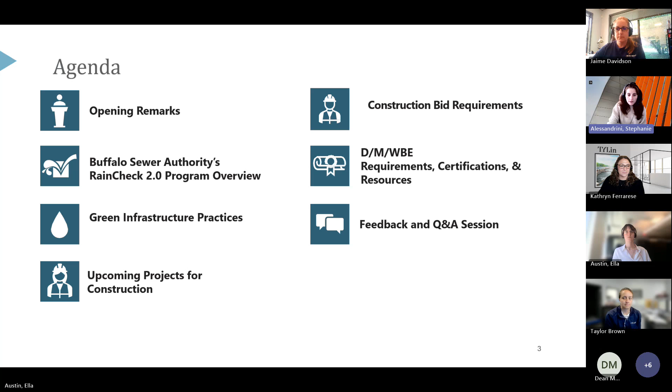The presenters we're going to have today: Rosaleen Nogle, the Principal Sanitary Engineer for Buffalo Sewer Authority - I think she's running a little bit late, so hopefully she'll be able to jump in and join us soon. We also have Kathryn Ferrarese, the program manager for the Queen City Clean Waters program. And then also myself, Stephanie Alessandrini, I'm the program manager for the green infrastructure side, and I'm with Stantec.

Just a disclaimer: this presentation is provided on June 16th, 2026. If you're viewing this after this date via the online recording, subsequent events could have had a material effect on this information. By presenting this information, Buffalo Sewer Authority has not undertaken any obligation to update it beyond the date of the presentation. Data and other information provided are not warranted as to completeness or accuracy and are subject to change without notice. The views, policies, programs, and practices reflected herein are also subject to change without notice, and this presentation is provided for your information and convenience.

The best place to find information on the upcoming opportunities is to go to buffalosewerauthority.org. You can hover your mouse over the top header, 'How Can We Help You?', and then click on the consultant, contractor, and supplier opportunities. This is where we'll have the upcoming bid opportunities that are coming out, for you to see.

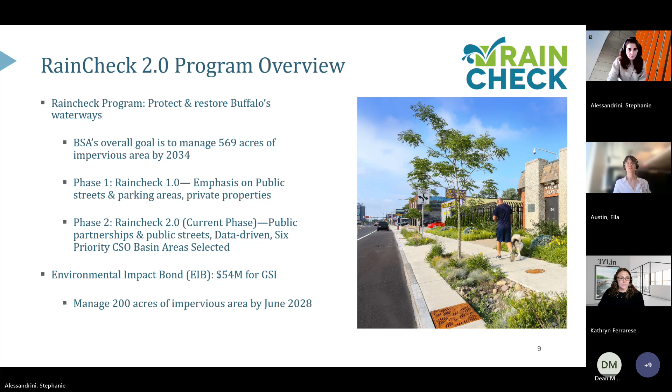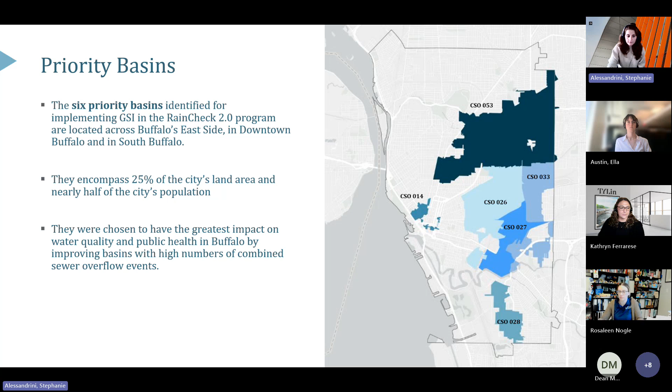So a little bit of timeline, the Rain Check program timeline and where we're at. In 2004 through 2014, there was development and approval of the long-term control plan. In 2015, the launch of the Rain Check 1.0 program. 2018 began the launch of the Rain Check 2.0 program. In 2021, BSA secured the $54 million environmental impact bond funding.

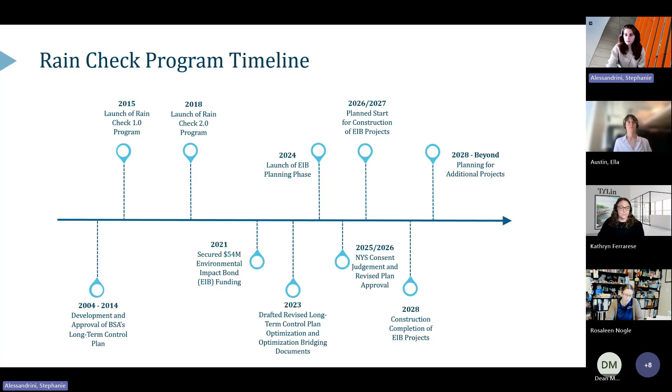In 2023, they began drafting the revised long-term control plan with optimization of the bridging documents. 2024 was the launch of the EIB planning phase, and then where we're at right now is finishing up the design with the GI projects, getting ready to release those for bid for construction. The consent judgment has also been submitted, so we're waiting on the final approvals for that.

So then the program packages. The planning phase had identified approximately 550 GSI practices across the priority sewer basins. With the goal of managing that 200 acres of impervious area, the packages are split into 14 different packages, located across those priority basins.

Within there is a Buffalo Public Schools package, the Municipal Housing Authority sites, and also city parks properties. The program management is by Stantec, and the design is currently being undertaken by AKRF, Wendel, Watts, and Stantec as well. Within here too, just a note that the BPS, BMHA, and parks packages are indicated by the pins within those boundary areas.

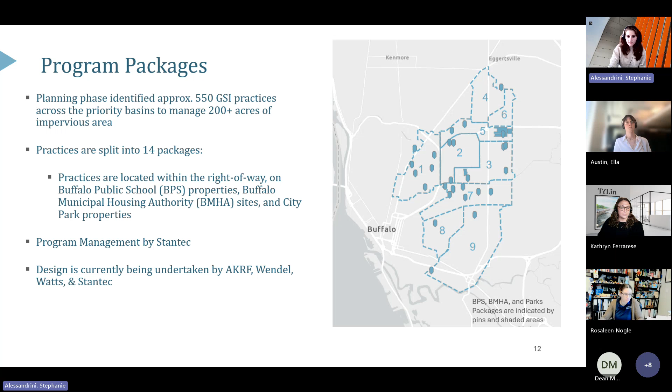So then getting into a little bit of information about the green infrastructure practices. There are four main different types of practices that we're proposing within the program. These include bioretention basins and swales, stormwater tree trenches, underground storage basins, and stormwater planters.

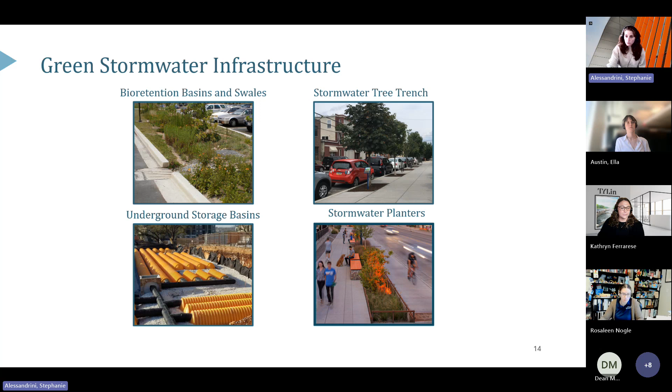So with the rain garden and bioretention areas, they're going to be designed either as flow-through systems or as infiltration systems, depending on the quality of the underlying soils, and also depending on the groundwater table. These are generally going to be located within the parks properties and also within school properties where there's available space. The depth for these systems varies between approximately 3 feet and 5 feet, depending on the site-specific conditions.

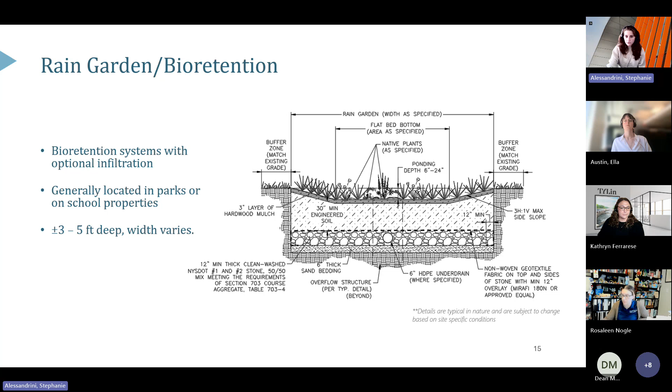So this is one of the typical details that we have included. Some of the details are undergoing a few revisions now, so there may be some minor adjustments that you'll see within the final sets that are released for bid.

The other types of systems that we're proposing are the stormwater tree trenches. These may have the infiltration option available as well, depending again on the underlying soil conditions. These will generally be located along the right-of-way underneath the sidewalk, and may extend beneath the curb line. On average, they'll be about 3 feet to 5 feet deep and up to 150 feet long.

This is an approximation, so depending on site-specific conditions, there may be some minor changes within the project-specific packages that are released. For some of these tree trenches, there may or may not be the option to include trees depending on the existing utilities or site constraints. In those situations, there may be some that only include the underground storage component with the stone reservoir and don't include trees within those specific areas.

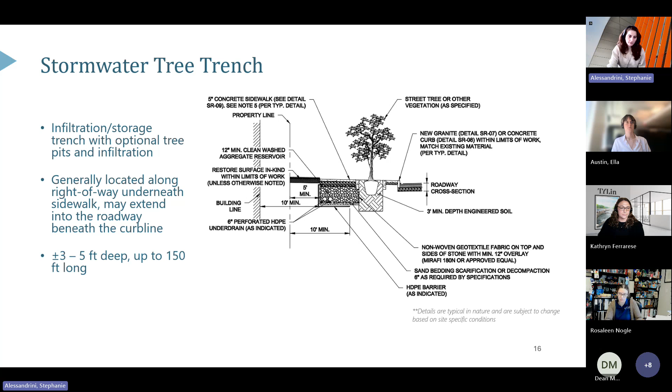That'll be denoted within the individual plans as well. And this is the infiltration trench. Some of these will be the systems designed without the tree pit included. So again, these are labeled infiltration trenches - some of them may infiltrate, some of them may not.

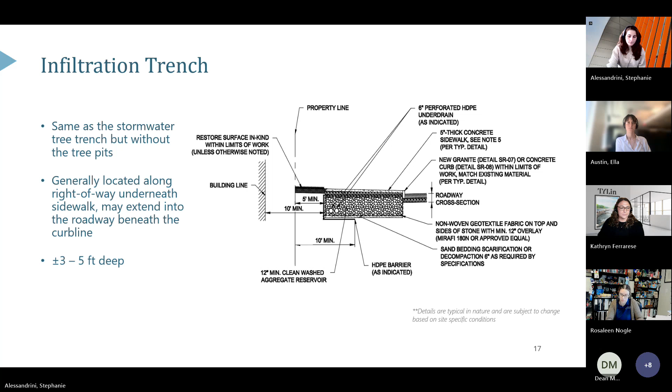In areas where we are concerned about potential for groundwater intrusion, there'll be an impermeable liner, and that will be indicated on the plans as well. Then the other item we have is the underground storage. This will be similar to the StormTech SC800 or similar kind of configuration for that underground storage reservoir. On average, these will be about 5 to 10 feet deep. We currently have this proposed on the Hennepin Parks Package 1 design, and there'll be a few others where we have that one included as well, which we'll get into a little bit later.

This is just the traditional underground storage kind of configuration, which will include the isolator row as well, wrapped in fabric, with the manifold and distribution to the other StormTech chambers surrounded by that stone reservoir. In areas where we're concerned about potential for groundwater intrusion, we will include that impermeable liner as well.

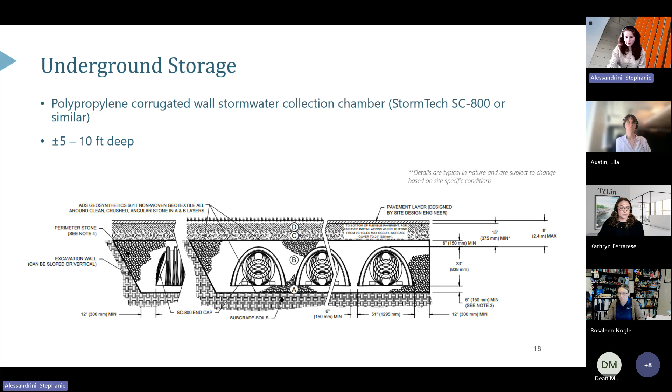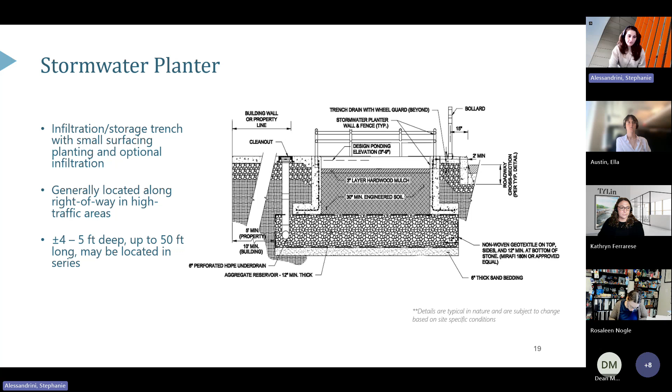There will also be some stormwater planters included, primarily within the parks packages and potentially on the schools or other areas that have available space. These will be approximately 4 to 5 feet deep and up to 50 feet long.

And then the bioswales as well. These will be located in areas that have suitable space available, most likely the Buffalo Public Schools package and potentially the parks packages as well, located in those grassy areas to help provide some of that conveyance.

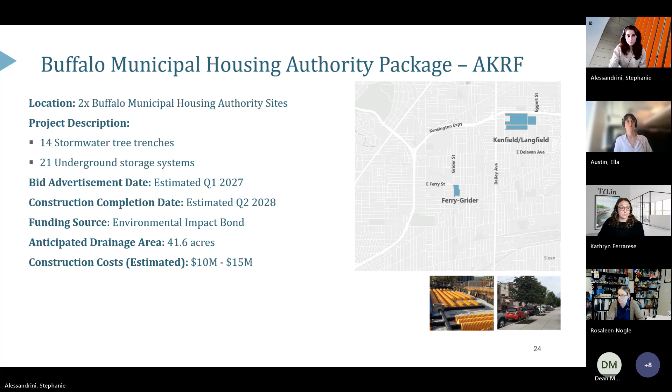Then we have the Buffalo Public Schools package being designed by Stantec. This will take place at approximately 16 Buffalo Public School properties, with approximately 36 total systems, including 5 bioretention basins, 7 stormwater tree trenches, 1 bioswale, and 23 underground storage systems. The bid advertisement date for this is estimated to be in Q3 of 2026, with the goal of construction completion by early 2028.

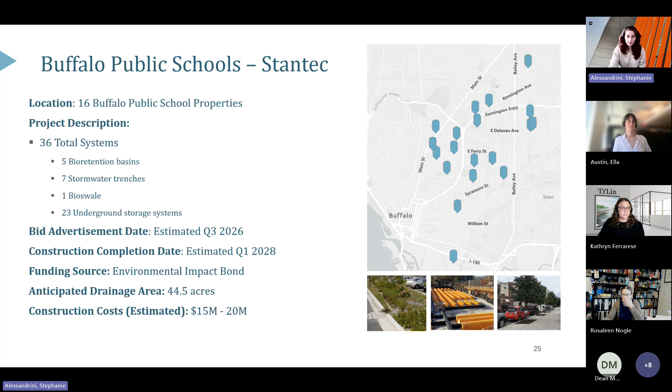Third-party verification will need to be completed prior to Q2 of 2028, per the requirements for the funding source of the environmental impact bond. The anticipated drainage area is approximately 44.5 acres, and the estimated construction cost is approximately 15 to 20 million.

Then there's right-of-way package 1 by Stantec. This is located within the right-of-way in the Masten Park, Hamlin Park, and Parkside neighborhoods. There's approximately 20 subsurface stormwater trenches included, a combination of stormwater tree trenches and infiltration trenches, with a good portion expected to not infiltrate at all. The estimated bid advertisement date is Q4 2026, with a construction completion date goal of Q1 2028. This will include funding from the Environmental Impact Bond and the Environmental Facilities Corporation Green Resiliency Grant, so this package will need to comply with those grant funding requirements. The anticipated drainage area is approximately 7 acres, and the estimated construction cost ranges from approximately 3 to 5 million.

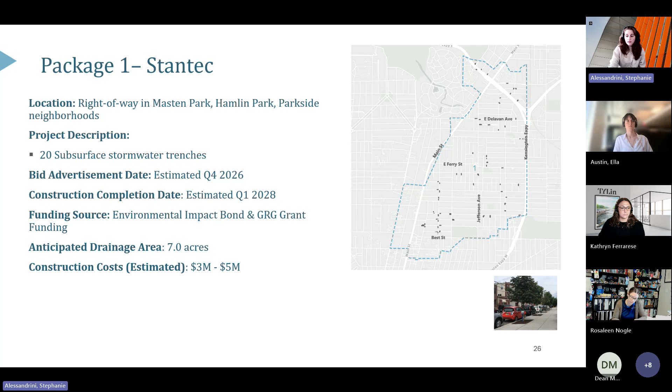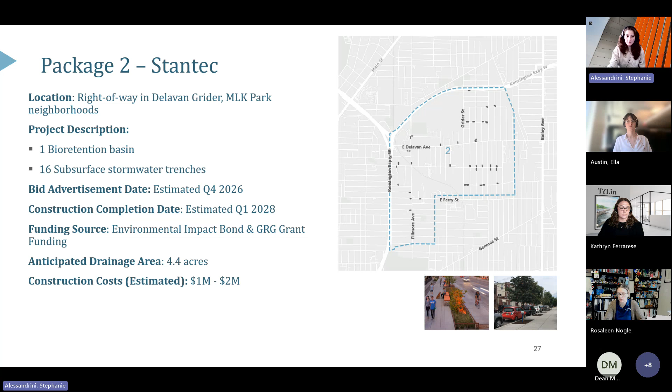Then for right-of-way package 2, this one is also being designed by Stantec. This is located within the right-of-way area in the Delavan Grider and MLK Park neighborhoods. This includes stormwater tree trenches and a bioretention basin: 1 proposed bioretention basin and 16 subsurface stormwater tree trenches, a combination of trenches that may infiltrate and those that won't, and trees and non-trees. This will be identified in the bid documents when released. The estimated bid advertisement date is Q4 2026, with estimated construction completion by Q1 2028. This package also includes Green Resiliency Grant funding and will need to comply with those requirements, as well as the Environmental Impact Bond funding. The anticipated drainage area is approximately 4.4 acres, and estimated construction costs range from 1 to approximately 2 million.

Then there's right-of-way package 3. This is being designed by Wendel and consists predominantly of stormwater tree trenches and underground infiltration trenches. Right-of-way package 3 is located within the right-of-way in the Schiller Park, Genesee Moselle, MLK Park, and Kenfield neighborhoods. The estimated bid advertisement date is Q4 2026, with an estimated construction completion date of Q2 2028. This will only include the Environmental Impact Bond funding; at this point there's no associated grant funding with this project. The anticipated drainage area is 14.3 acres, and construction costs are estimated at about 5 to 10 million.

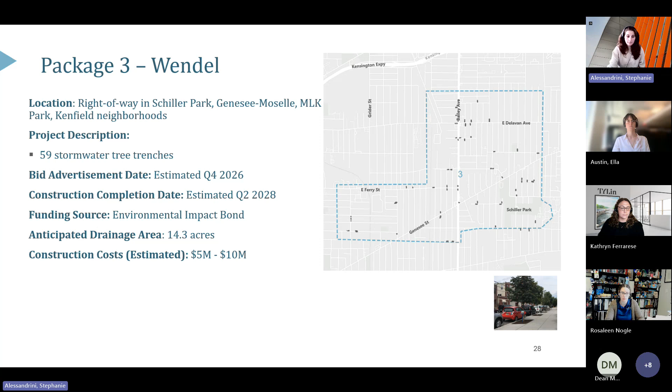Right-of-way package 4 will be designed by Stantec, located within the right-of-way area in the University Heights and Kensington Bailey neighborhoods. This package will consist predominantly of stormwater tree trenches, again a combination of trenches with trees, without trees, and either infiltrating or not infiltrating. Estimating the bid advertisement date by Q4 2026, with estimated construction completion by Q1 2028. The funding source will be through the Environmental Impact Bond, and if needed will also include the Green Resiliency Grant funding. It's to be determined if additional practices from this package will need to be included for the grant funding requirements, so there's a possibility that this package or portions may need to comply with those requirements.

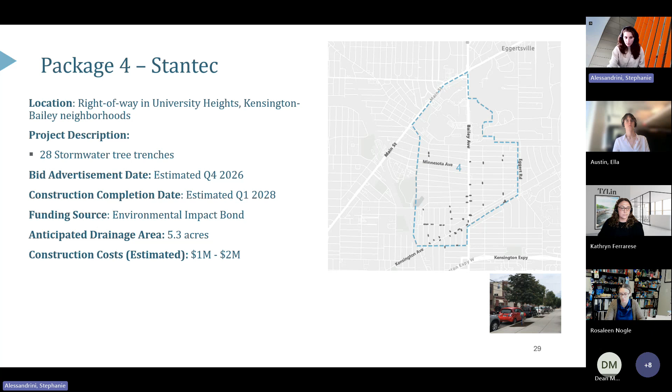Right-of-way package 5 will be designed by Wendel. This is located within the right-of-way of the Fillmore Leroy, Kensington Bailey, and Kenfield neighborhoods. There are approximately 28 stormwater tree trenches within the design area. The estimated bid advertisement date is Q4 2026, with estimated construction completion by Q1 2028. The funding source will be through the Environmental Impact Bond. The anticipated drainage area is approximately 9.7 acres, and estimated construction costs are on the order of $3 to $5 million.

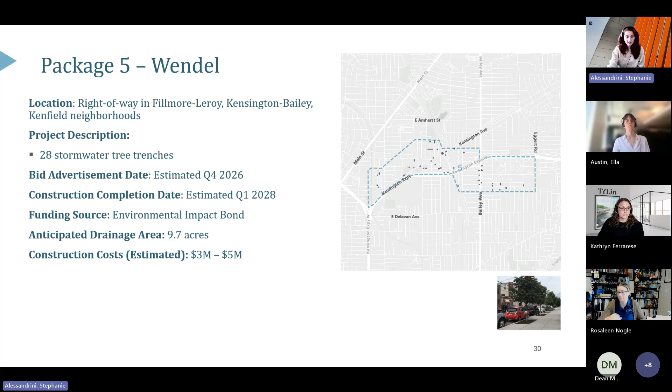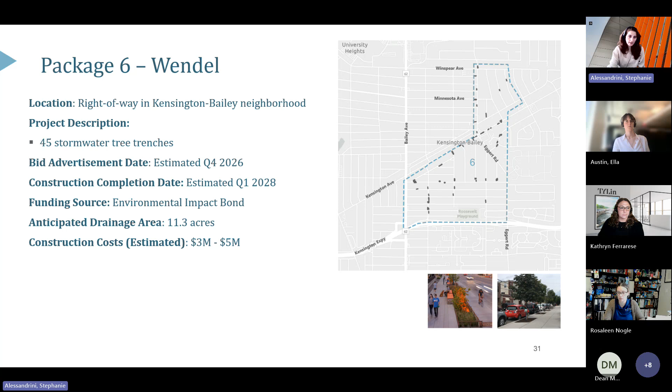There's right-of-way package 6, also designed by Wendel, located within the right-of-way in the Kensington Bailey neighborhood. There are approximately 45 stormwater tree trenches proposed, with the bid advertisement date expected within Q4 2026. The anticipated construction completion date is by Q1 2028. The funding source will be through the Environmental Impact Bond. Anticipated drainage area is approximately 11.3 acres, and anticipated construction costs are $3 to $5 million.

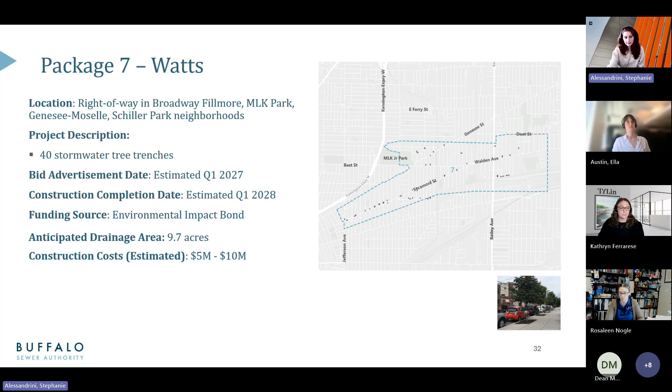Then right-of-way package 7 will be designed by Watts, located within the Broadway Fillmore, MLK Park, Genesee Moselle, and Schiller Park neighborhoods. This will include approximately 40 stormwater tree trenches. The bid advertisement date is Q1 2027, with an estimated completion date for construction by Q1 2028. The funding source will be through the Environmental Impact Bond. The anticipated drainage area is approximately 9.7 acres, and anticipated construction costs are approximately $5 to $10 million.

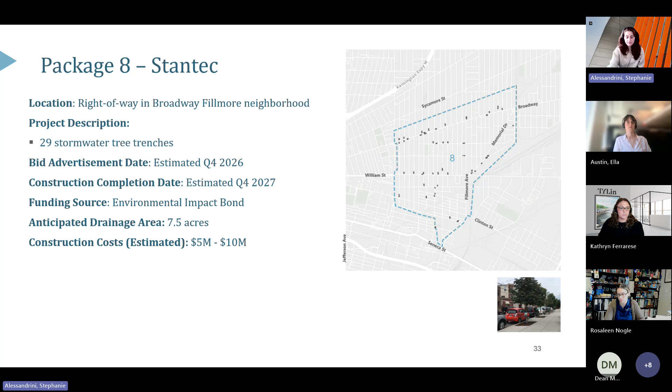Then right-of-way package 8 will be designed by Stantec, located within the right-of-way of the Broadway Fillmore neighborhood. There are approximately 29 stormwater tree trenches, and the estimated bid advertisement date is Q4 2026. The estimated construction completion date is end of 2027. The funding for this will be through the Environmental Impact Bond. The anticipated drainage area is approximately 7.5 acres, and estimated construction costs vary from about $5 to $10 million.

And then right-of-way package 9 will also be designed by Stantec. This is located within the right-of-way of the Lovejoy, Broadway Fillmore, and the Seneca Babcock neighborhoods. This includes approximately 27 stormwater tree trenches, with the estimated bid advertisement date of Q1 2027. The estimated construction completion date is Q1 2028. The funding source for this will be through the Environmental Impact Bond. The anticipated drainage area will be approximately 7.1 acres, and the estimated construction costs will be on the order of $3 to $5 million.

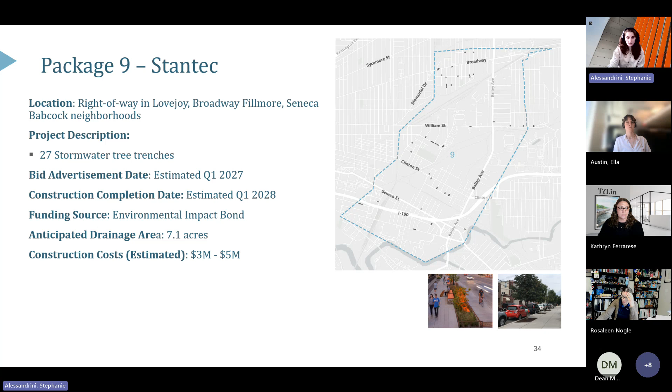I removed Parks Package 1 since that one had already gone out to bid and that bid was awarded. That was awarded to, I believe, Destro Brothers. Then there's Parks Package 2, which is currently under design by Watts. This is located within the MLK Junior Park, the Genesee Gateway Park, Eddie Dawson Park, and within the Lincoln Playground, as we've shown here within the screenshot on the right.

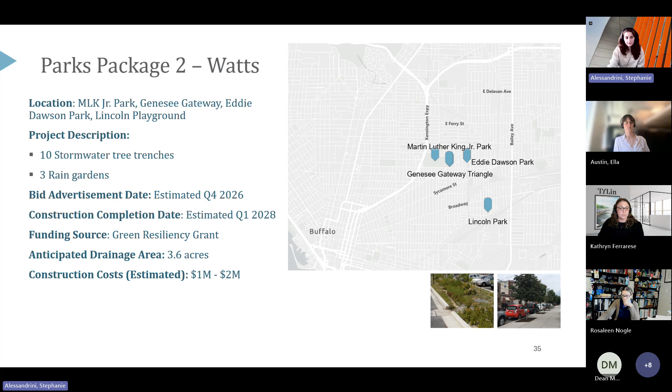These packages will include approximately 10 stormwater tree trenches and 3 rain gardens. The bid advertisement date for these are expected in Q4 2026, with the required construction completion date by Q1 2028. The funding source for this package will be through the Green Resiliency Grant through the Environmental Facilities Corporation, and so construction will need to comply with those requirements. The anticipated drainage area will be approximately 3.6 acres, and the estimated construction costs will be on the order of 1 to 2 million.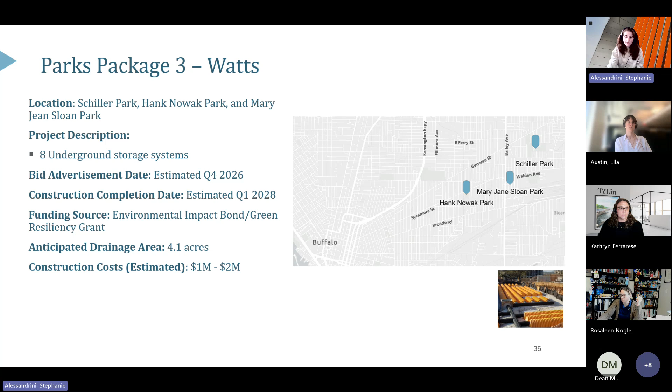The funding source for this will be primarily from the New York State Environmental Facilities Corporation Green Resiliency Grant funding, and so it will need to comply with those EFC requirements, with some supplemental funding from the Environmental Impact Bond as needed. The anticipated drainage area will be approximately 4.1 acres, and the estimated construction costs will be on the order of 1 to 2 million. So that wraps up the proposed green infrastructure projects. Now I'll turn it over to Kathryn to discuss the upcoming gray infrastructure projects.

Thanks, Stephanie. Welcome and thank you for joining us. I'm Kathryn Ferrarese, the Program Manager for Buffalo Sewer Authority's Capital Improvement Plan Program. I'm joined today by 2 members from JM Davidson Engineering, Jaime Davidson and Taylor Brown. They are representing members of the program management team and are also the design engineers for the 2 projects that I'll go through this afternoon.

This afternoon, I'll provide updates on 2 major Queen City Clean Waters projects that are scheduled to advance to construction by the end of this calendar year. These projects represent important milestones in the implementation of Buffalo Sewer Authority's long-term control plan. Since the original LTCP was developed, BSA has completed quite a bit of additional work, additional planning, hydraulic modeling, and alternatives evaluations to better understand how to achieve the water quality goals associated with the long-term control plan. As a result, the program has evolved from a collection of individual projects to a more integrated system-wide strategy focused on maximizing overflow reduction and environmental benefit.

BSA recently submitted an amended long-term control plan to the New York State Department of Environmental Conservation for review and approval. Following DEC approval, the updated LTCP will be made available to the public and will serve as the roadmap for the Queen City Clean Waters program and investments across the city of Buffalo. This afternoon's presentation will take an early look at 2 of those projects that are helping advance that future program forward today. We appreciate your interest and involvement as BSA continues to invest in infrastructure that will benefit Buffalo's communities and waterways for decades to come.

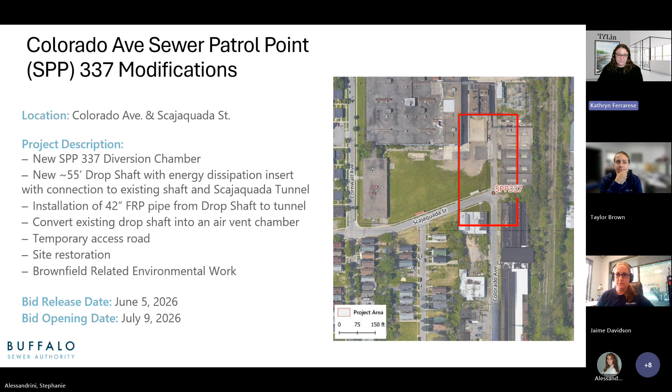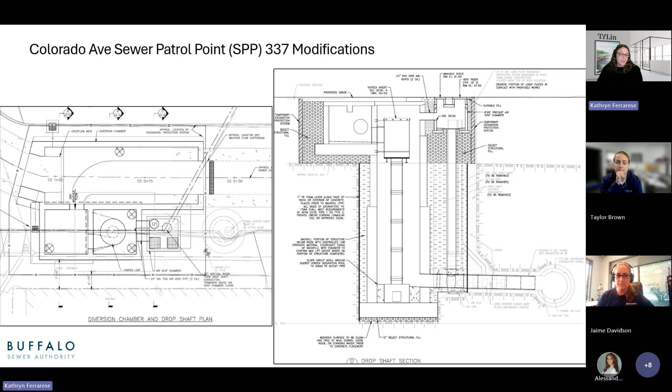This figure illustrates how the new infrastructure will fit into the existing site. The diversion chamber will intercept flows and direct them into the new drop shaft. From there, the flows will be conveyed through a new piped connection to the Scajaquada tunnel. While much of the infrastructure is underground, construction will require temporary work areas, access roads, and staging locations. BSA and its contractors will work to minimize impacts to nearby residents and businesses whenever possible. Upon completion, the site will be restored.

The next project is the Louisiana Street Sewer Patrol Point 137 modifications and inline storage. This project is located along Louisiana Street between South Street and Republic Street. Sewer Patrol Point 137 overflows to CSO 64, which discharges to the Ohio Drain and ultimately the Buffalo River. The primary purpose of this project is to create additional inline storage within the existing sewer system.

The project consists of two new 60-inch reinforced concrete pipes that will be installed to temporarily store wet weather flows during storm events. The two new larger 60-inch diameter sewers will replace the existing 24-inch diameter sewer upstream of SPP 137. Once the wet weather event has ended, the stored flow is sent to treatment at the wastewater treatment plant facility. Water collected in the ILS system should drain within about 24 hours, and we do not anticipate odors to be present from the stored water.

This project also involves modifications at SPP 137, including removing the underflow orifice pipe and raising the orifice by about 1.5 feet. This project also includes replacement of aging drainage infrastructure, including catch basins, sewers, and service laterals within the project limits. These improvements will increase system reliability while helping reduce combined sewer overflow events.

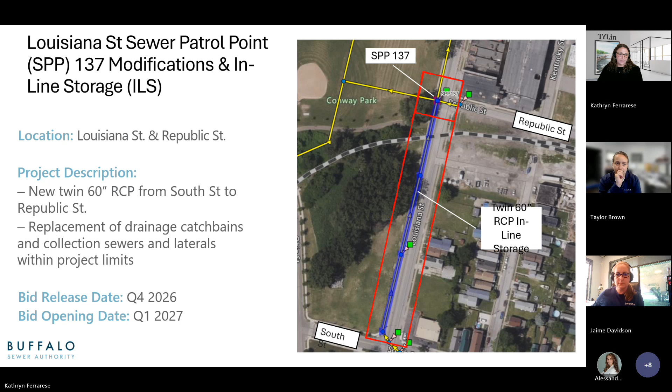This graphic shows the planned alignment of the new inline storage facilities. The twin storage pipes will be installed beneath Louisiana Street and connected to the existing sewer network. During major rain events, these pipes will temporarily store excess flow and help prevent overflows. Construction will occur primarily within the roadway corridor and will require traffic management and temporary access modifications. Residents and businesses will receive advance notice regarding construction activities and anticipated impacts. And following construction, all disturbed areas will be restored.

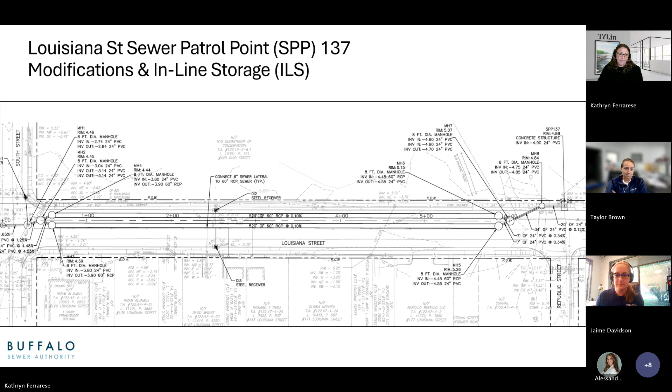As these projects move forward toward construction, BSA will continue to provide updates and coordinate with residents, businesses, and stakeholders regarding schedules and anticipated impacts. Thank you for taking the time to learn more about these two upcoming projects under the Queen City Clean Waters Program. We also look forward to sharing the updated long-term control plan with the public once it is approved by the New York State Department of Environmental Conservation. Your feedback and participation are valuable as we continue to advance these important improvements throughout the city.

My team of design engineers from J.M. Davidson would be happy to answer any questions you may have about either of these projects. Are there any questions at this time? Okay. I'll stay on at the end of the presentation as well. With that, I'll hand it back over to Rosie to go through the construction bid requirements.

Hi, this is Rosaleen Nogle with the Buffalo Sewer Authority, Principal Sanitary Engineer. Go ahead through those requirements.

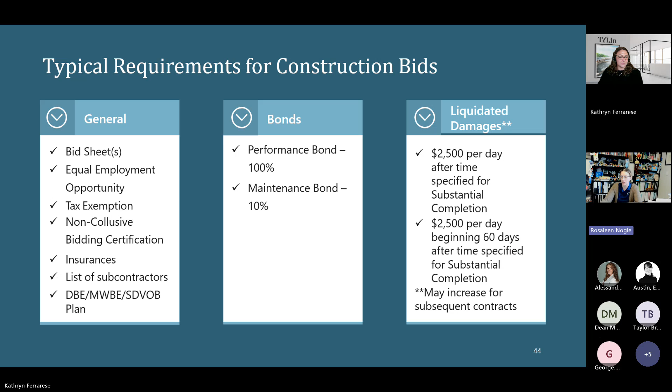These are being in part driven by that long-term control plan and compliance needs, so that we ensure substantial completion is occurring on time on our contracts. So this is the typical bid timeline. We advertise for about 5 weeks, open, and then we will be moving forward with the contract award and then notice to proceed.

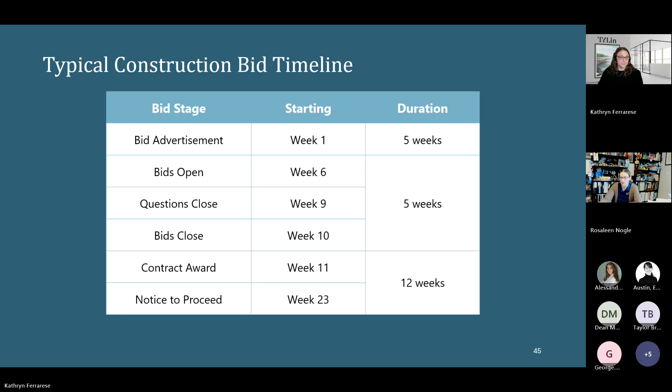And again, as mentioned before, historically underrepresented firms. We are looking to build capacity within the City of Buffalo, particularly with those underrepresented groups, but also just broadly within the City of Buffalo, while continuing to have relationships with longstanding and traditional businesses. We see this as an opportunity not just for these underrepresented groups in particular, but for small businesses more broadly to grow in the City of Buffalo.

For those that have a DBE goal, it is 20%. The MWBE goal is 30%. We do understand that there is ongoing evolution of the DBE process, and this is out of the hands both of New York State and the Buffalo Sewer Authority right now. However, the MWBE goals are not going anywhere, and for those projects that still have DBE goals, we will continue to be looking for compliance with the DBE process.